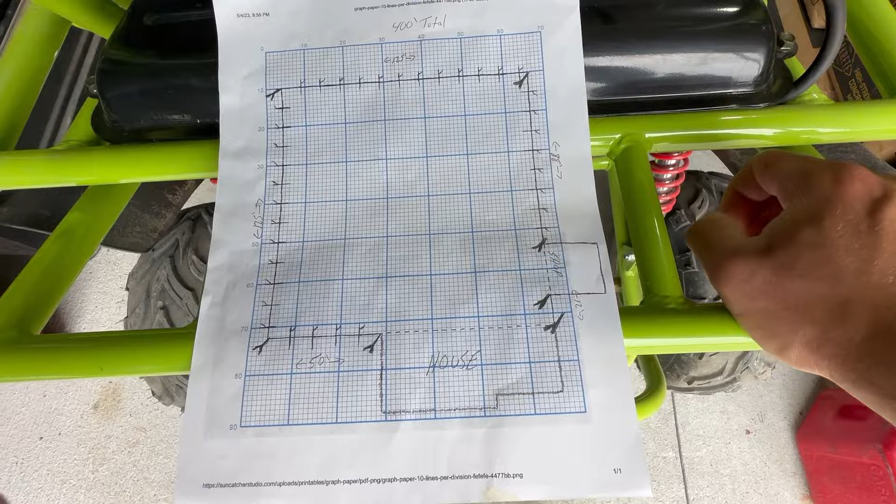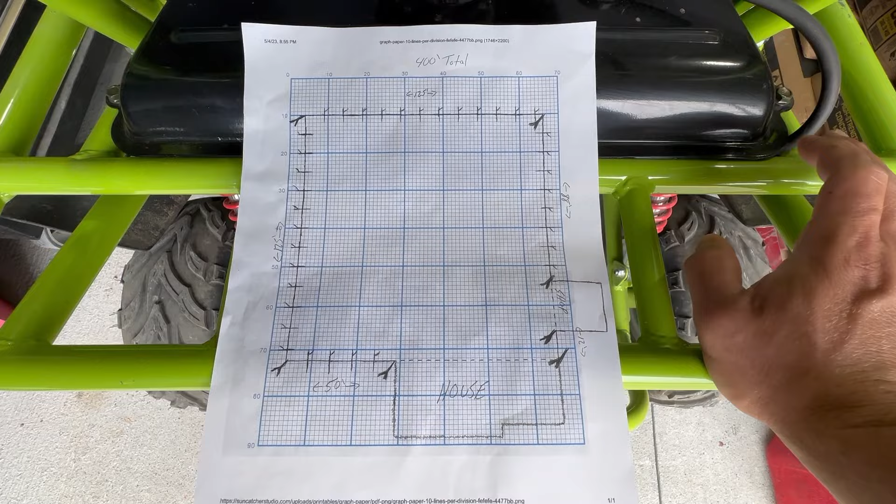First, what I did was I went on Google Maps, and if you type your address in, you can pull like an overhead view, like a satellite view of your house. And it's really nice, especially so you can get an idea, like if your neighbors have a fence that you like the size of. If you right click, you can go to measure, and then you can actually draw lines in the Google Maps, and it'll show you, well, not exactly, it's really close though. It'll show you about the size of their fence, or you can get an idea of what it'll look like on your property. But that's what I did first.

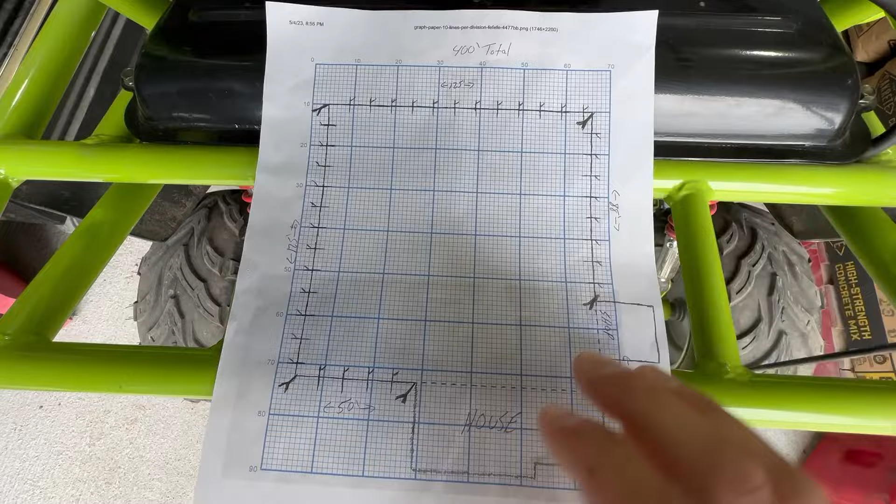And then I went outside and I kind of measured everything out and drew it on this grid paper. The reason it's really good to do that is so you can get an idea of where you want your terminal post and line post to be. And it's easier to say 1, 2, 3, 4 than to try to guess in your head about how many posts, especially when you got this much stuff going on. It's easier to just have something visual so you can keep looking at it, especially when you're ordering stuff.

I ordered all my stuff online, so it was easy to go back and say, hey, I need this many terminal posts. I needed this many tension bands, or this many tension bars, or the post on the top. I mean, it's just easier to draw it out and look at it. So I went on Google Maps, figured that out, and then I went and drew it.

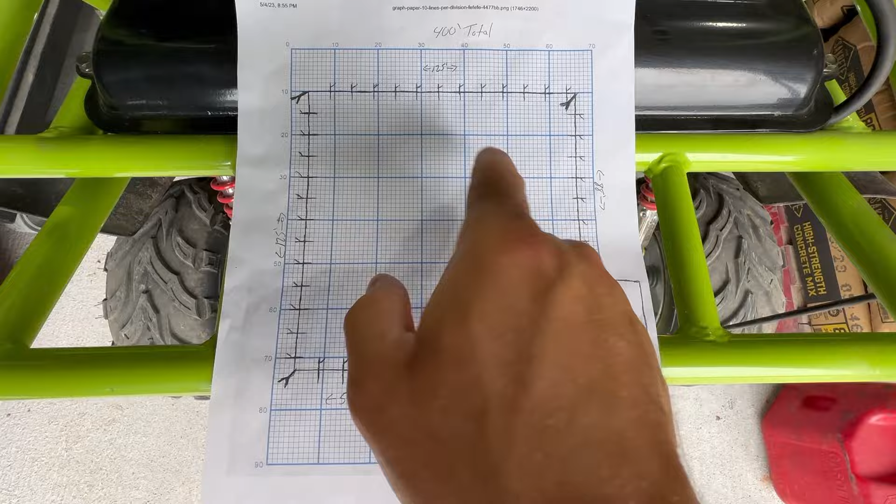And then I actually went out and walked it in my yard to make sure that that was going to be sufficient for me. And as you see, I kept it within like the 50-foot increment marks, so it'll be right at 400 feet.

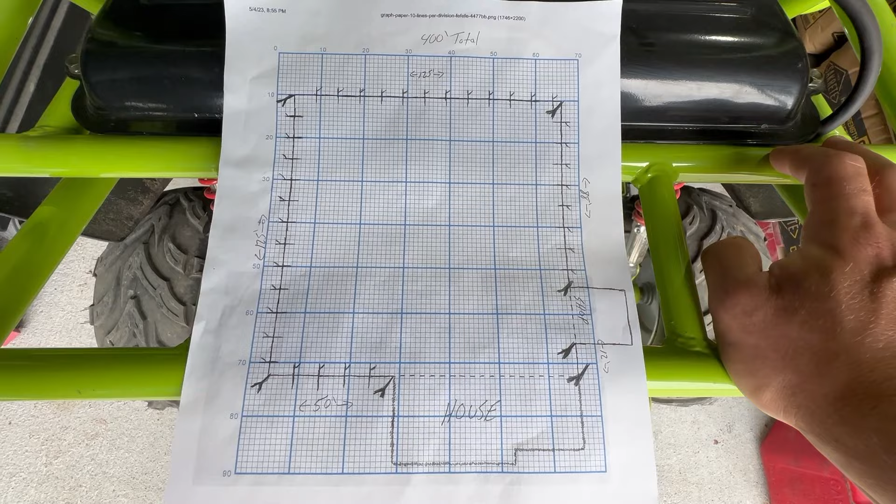Those rolls, I'm gonna give you some advice right here. I think you need to probably stick with those rolls. 9 of them come to a pallet. Okay, if you only need 6, still get 9 and just take the 3 back to the store if you can do that, because I have seen too many times where you get 6 and the people don't put them on a pallet right, and the fence gets all bent up and screwed up, and then you have to deal with trying to straighten it and everything.

It's easier to just get a pallet that's strapped together, never been tampered with from the factory. It's coming straight from the factory like that. Nobody's taken it off and screwed it up or nothing like that. So let's go on to the next step and making sure everything's square.

To make sure that your fence is square with your building or house or whatever, you're going to be using something called the 3-4-5 method. And what that is, it makes a triangle, and you'll know everything's square. So right here, for example, you can use 3 tape measures. You can cut a piece of stick, a piece of pipe, whatever you need to do to make sure you got 3 foot, 4 foot, and 5 foot. Does that make sense? Because that makes the triangle, right?

So you can get a piece that's 3 foot here, get a piece that's 4 foot here, and between those two, if it's square, it should be 5 feet. What I did to make sure I was definitely square, instead of 3, 4, 5, I did 6, 8, 10. You got 6 feet long, 8 feet long, and then between those two should be 10 feet if this is square.

And I obviously checked it here to make sure that this was square. And then I went on the other side of the house because I wanted it square with that as well. So that's how I got my square. After I figured out where everything would be square, I got a piece of rebar and I put it in the ground right there where that post is, as close to the building as I can, where I want my fence post to be.

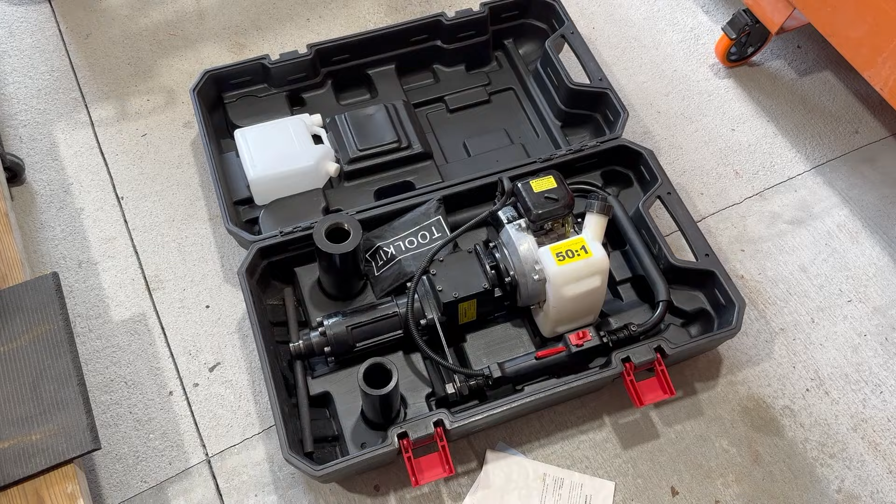Normally on these Chinese units, as long as you do your maintenance, keep everything clean, keep clean gas in it, make sure nothing's dry, make sure everything's greased and oiled like it should be, these things will last a long time. I've used this thing to drive in 10-foot sticks of rebar all day on retaining wall jobs and stuff. It will take a big piece of rebar and drive it all the way 10 feet down in the ground with no problem.

I drove all those fence posts with it a foot in the ground, no problem. Matter of fact, it was kind of too fast. I had to baby the throttle to make sure it didn't drive it in too fast. This thing works great. You can probably rent these if you don't want to buy it. I think I paid like $284. It was on sale at that price. I think regularly it was like $350 or something, but definitely worth it if you're going to be using a sledgehammer a lot, because this beats the heck out of using the sledgehammer.

And like I said, I've had this for about 5 years and never had an issue with it. I'm sure you can probably rent something like this if you don't want to spend that money. If you're only going to be using this one time, you might as well rent it. But that's the gas-powered hammer if you've never seen one.

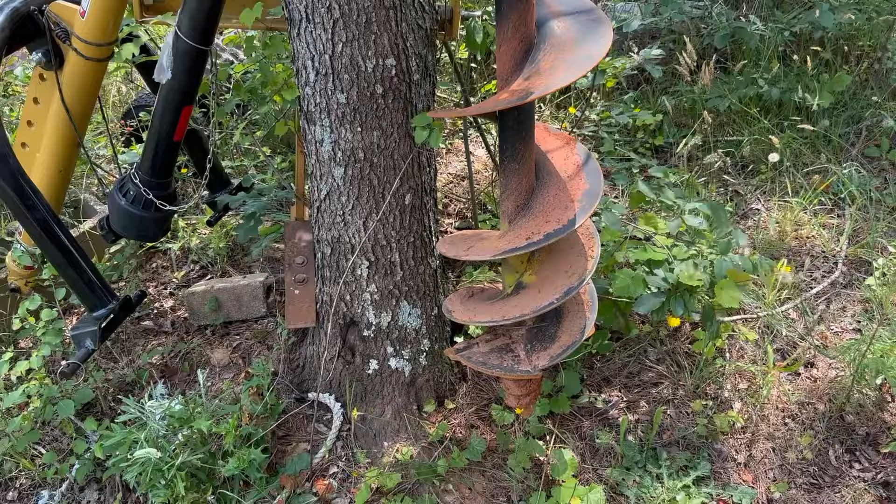Here's the auger I used. I used it on the back of my tractor. It's a 12-inch auger. It's pretty cool. You can still see the yellow paint that I marked right there. I put that as a 1 foot mark, from the bottom of that to there. So that way I knew where to stop to make sure my hole was 1 foot deep. You can rent these as well if you have a tractor. The local places I have, you can rent them. You can also get manual ones.

You can also have lots of fun and get a post hole digger. I did have to use a post hole digger on all those holes, because as you know, if you've ever used one of these, it does not clean the hole out perfectly. A lot falls back down in it. So I went around, drilled all my holes, and with post hole diggers I just cleaned the soft stuff out of the hole.

So let's pretend that my mason's line is still here. Remember in the beginning of the video, I talked about having a rebar there, mason's line, rebar here, mason's line, rebar there, and so on. So I went up through here. I have a really long tape measure. It's like 300 feet. I laid it out.

You can use a regular tape measure too. I actually did use that to double check everything, but what I did was measure my distance between there and there, use my calculator to see what my spacing needs to be, and then went up through here and made marks with my shovel where I needed to dig my hole. And then I came down through here.

I left my mason's line in place, and I had my dad come pull the line out of the way. I would dig the hole, then he would let go of it and it'd go back in place. And we'd walk down here, because I've already made my mark with my shovel, so I knew where to put my digger or my auger. Grab the line, he'd move it out of the way, I'd dig the hole.

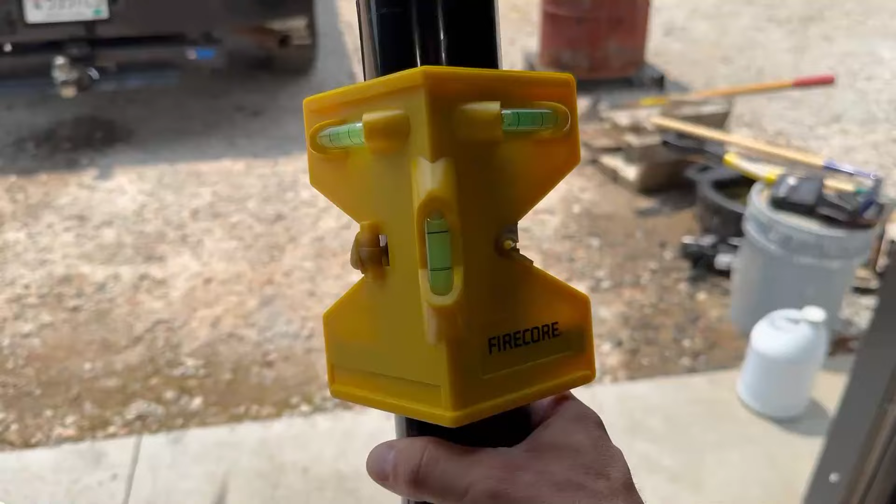But this is the piece of post that I cut off. Those 2 posts right there, I had to cut those off a bit because the foundation to my shop and the foundation to my house came out about 2 feet. So I had to cut them off about that much and use a little bit extra concrete. Anyways, that's where this piece of fence came from.

But this is a post level. This is a rubber band on it. It's got where you can just, let's see if I can, yeah, you get what I'm saying. It's hard to look at a camera and do this at the same time. But I have my dad hold this while I hammer the things in the ground.

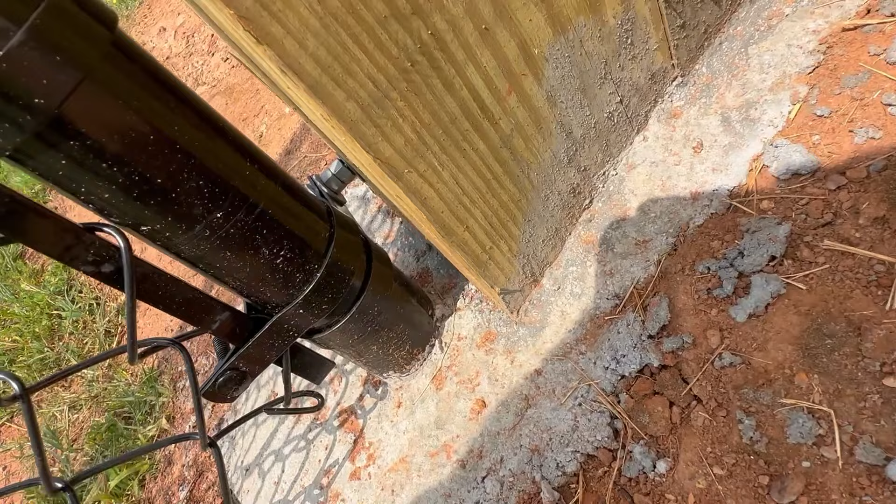So this post is in the ground good. I cut these off to match the top of it. Used these 2 screws to hold everything in place, and then I concreted around. And these 6x6s are bolted together. They're definitely not going to come apart. This is very sturdy. It's not going to be moving anytime soon.

But plan is, once this dries out, I'm going to paint it black, and you won't really be able to tell anything. I also, not sure if you can see the gap, but I don't have it touching the house. It's maybe 1/8 of an inch away for bugs and things like that. But that's what I did there. It doesn't look the best, but I didn't want to deal with drilling into my house foundation. I didn't think that was much of a good idea, so this is what I came up with.

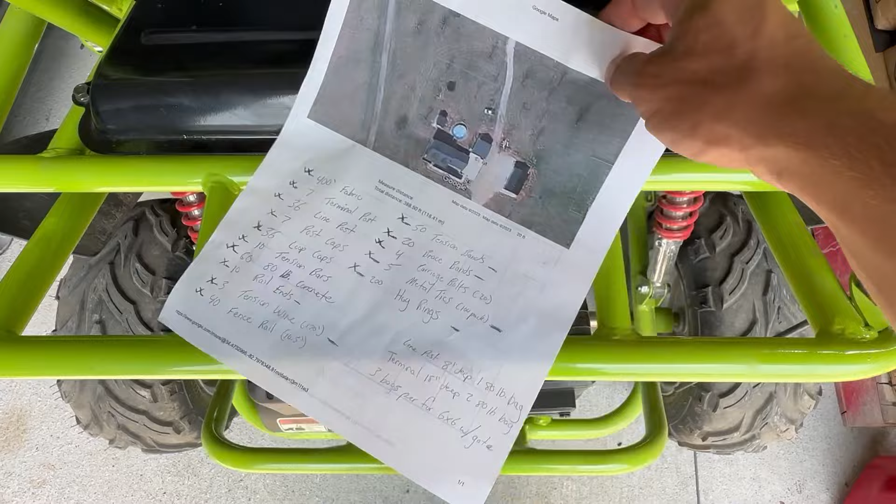When I was talking about this, I completely forgot that it was on the back of this. And this is the Google Map kind of view of my house. And that was where I drew out the fence. And that's about exactly where it was going to be. It's a very old picture, you can tell. But that's where the fence is going to be. And what was cool about this, I could write down everything that I needed.

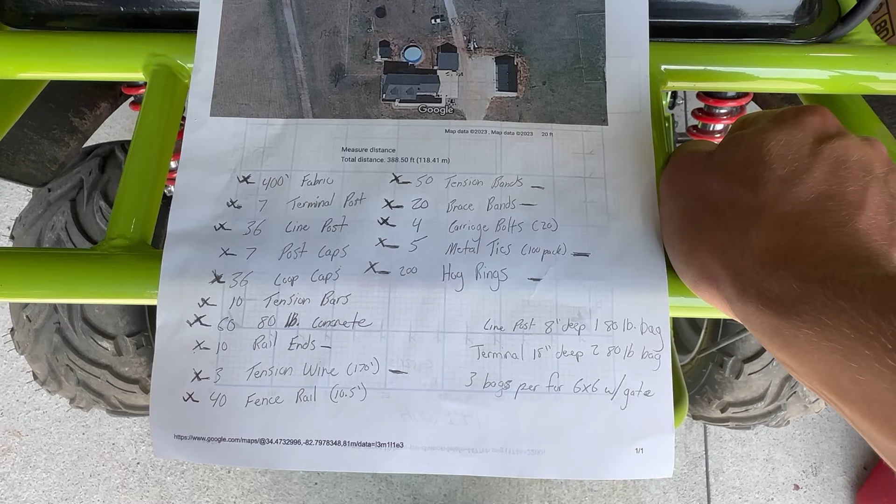400 feet of fabric, terminal posts, line post caps, and so on and so forth. And I could kind of figure out exactly what I needed. I ordered actually more than what I needed for most of this. This is just like the bare minimum, if that makes sense. But I ordered more than this just because on the Lowe's website you get bulk discounts.

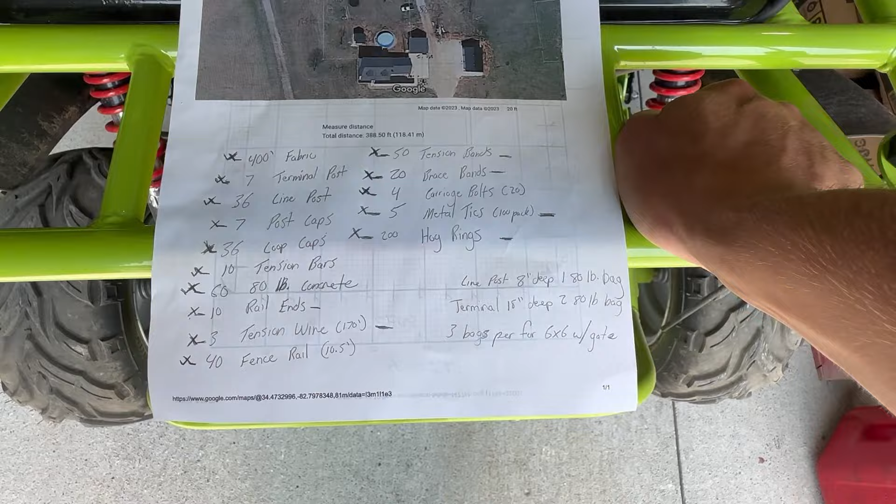And as I was explaining a while ago about the fabric, if you order 9, that comes to a pallet. So I got 450 feet of that instead of 400. And the concrete, I obviously got some left over, and that's for another project that I got going on. See, I only needed 60, but I ordered 84. But anyways, that's what the overhead view is going to look like. It just made it a lot easier to be able to look at this.

All right, guys. The reason I keep coming right here is because this building is blocking the wind. It's really windy today, and I want you to be able to understand what I'm saying. So now that all your posts are set in concrete and everything's ready to go, you're ready to put your fabric up. You're going to have somebody hold this roll of fabric. It's not heavy, but it's heavy enough to where you need 2 people, one to hold the fabric, and it's in a roll, obviously.

You get your end. It's probably a good idea to go ahead and get all your bands slid down to the bottom so you can just pick them up and slide them where they need to be, to hold the fabric in place. Then you get your tension bar, and you literally just drop it straight down through there like so. You fasten it in. I didn't fool with getting these tight yet. I just got it to where it kind of held everything in place. So I got these held in place, and then I stretched the fabric out.

Let's just walk over here. Instead of imagining, you can just see. So we've got somebody holding the fabric up, got the tension bar through it, got the tension bar through the bands, got the bands tightened down. Imagine you got a big roll of fabric here. Just roll that stuff out all the way down through there and lay it on the ground. Without any tools, just kind of pull it out and stretch as much of the tension out as you can, because this stuff stretches good. It'll surprise you. Just by shaking it and working the looseness out of it on the ground.

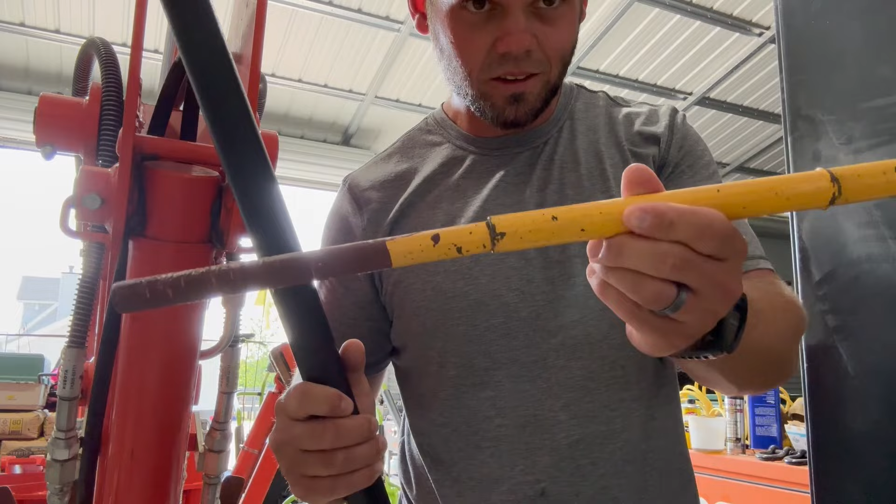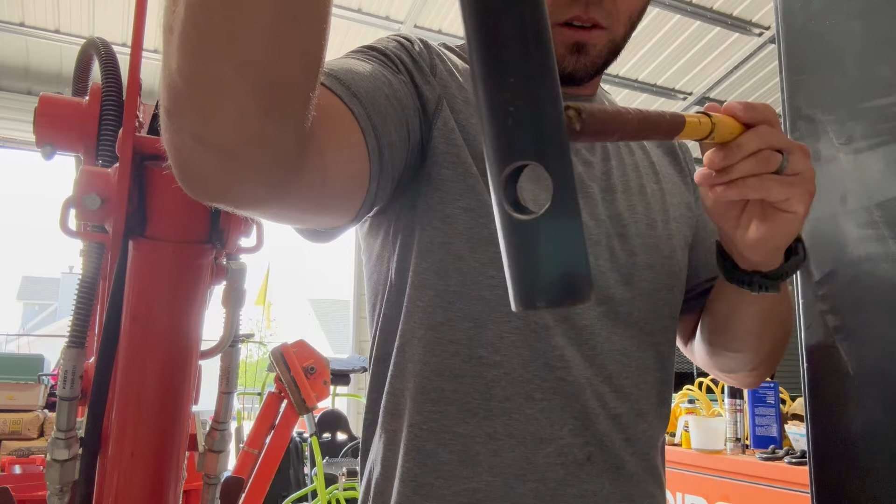And like I said, you can buy this tool, but I just use, this is an old jack handle. I always keep random stuff like this around. This is a piece of pipe. I drilled, see that hole right there? This is a small hole. You run your wire through this. So imagine your wire's running through this and it's against the fence pole, right? Well, I drilled a big hole right here that this can go through. So you got your wire in through and it's against the post.

You literally just turn it clockwise and that tensions the wire. And you just keep turning it until it's tensioned enough, and then you turn it back and it'll stay tensioned because that wire is so thick and stiff. It'll stay in place, and you can just get this out of the way, wrap it around with your needlenose pliers or lineman's pliers or fingers if you got that in you, and snip it off.

All right, so we went over getting everything square, getting the mason's line set up, getting our holes dug, getting our posts in the ground, the concrete in the ground, the wire set up, the top rails on. Obviously the caps just set on there. You can get a mallet and hammer them on, or you can just twist them on if you got enough grip strength. We've got the tension bands and bars and the end caps and everything set up. We've went over getting everything tensioned. You should be ready enough to at least get a section of fence put up.

And once you get that figured out or figured out how to do, you can do the rest of it. Now that we've covered all that, I'll go ahead and show you this gate. As you can tell, that is not a standard chain link gate. I called around, that's a 12-foot wide gate. And I called around, you have to get this custom made in black.

I couldn't find anything over a 4-foot gate in my area, and it was galvanized only. Come to find out, you have to get those custom made, like by a local welder. If you watched any of my other videos, you know I know how to weld and everything, but that takes some time. And then when you go to weld on this black vinyl, you're gonna end up melting some of it off. You're gonna deal with painting it and all this.

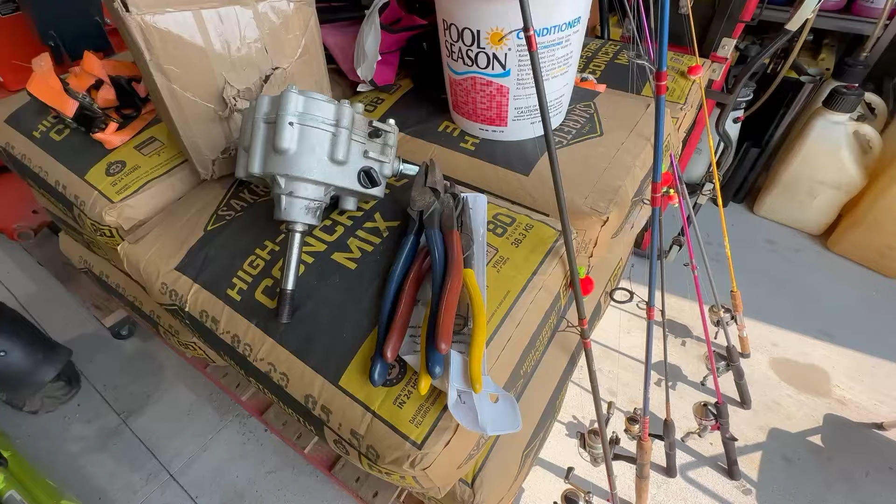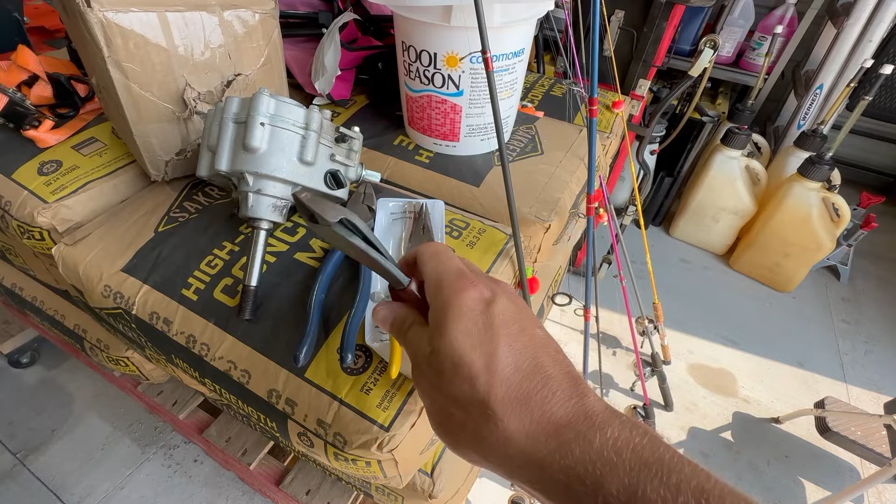As far as tools go, I used an impact driver with like a socket adapter, but you don't have to use that. You can use a ratchet. The impact was a heck of a lot faster, but I used a ratchet on everything to check the tension to make sure the tension was right, because I didn't want to over tighten anything and strip the bolts out. I used this set of Linemans Pliers for bending the wire that we were talking about earlier. I used this to cut the wire close if I couldn't cut it close enough. These are just side cutters, dikes, whatever you want to call them.

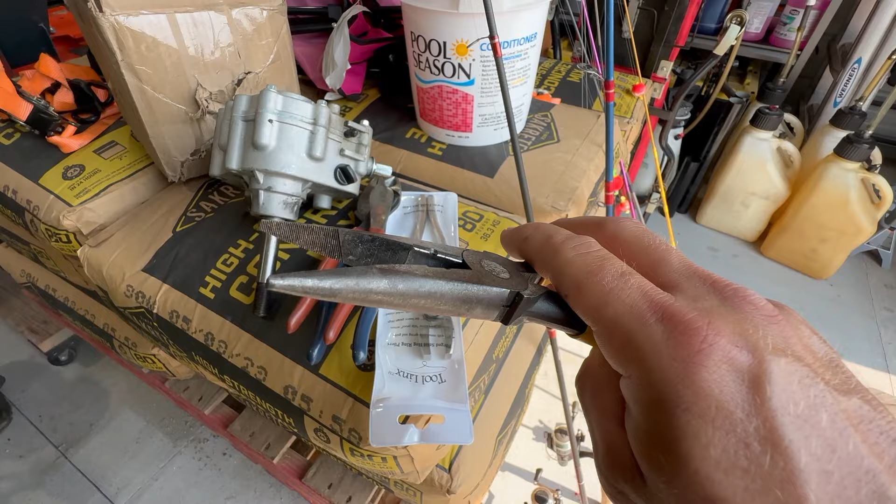And I used these Needlenose Pliers. You see how a lot of Needlenose Pliers are smooth, but you see how that's serrated? These grab really good if you're trying to pull something. These are mainly for electricians, but I use these. All of these are Klein. Klein's really good stuff.

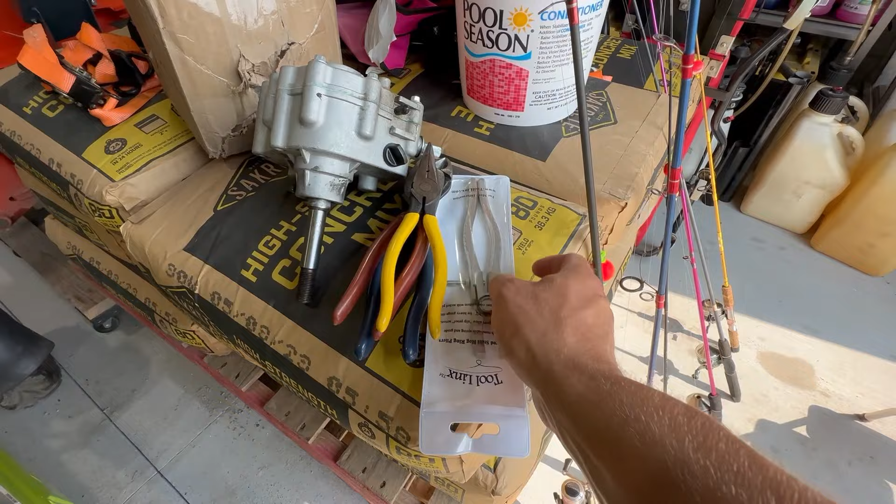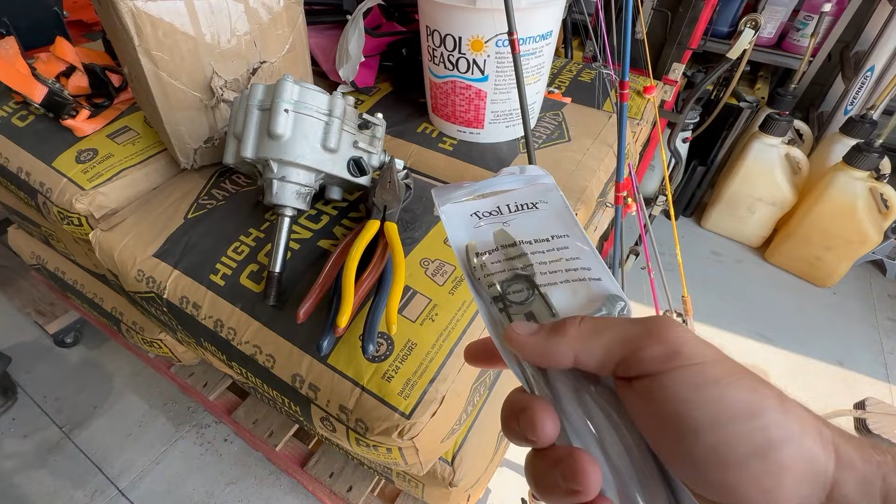And I also ordered this set. I didn't have these because I've never done this before, but these are Hog Ring Pliers. They have a groove. See that groove right there? The hog ring actually sets into it, and that spring holds it together. So all you got to do is go up to the tension wire and squeeze it, and it perfectly goes around. And the spring has tension, so you can just pop another hog ring in and then go down through your fence like that and just get everything.

Other than this, I used, like I said, the auger. I used the gas-powered hammer. I used a set of bolt cutters to cut the rebar when I was driving for the mason line. Used a knife. Bolt cutters to cut that, knife, ton of stuff. I used a pencil, used tape measures. I did use a porta band as well.

If you don't have a porta band or want to buy one, you can use a hacksaw for cutting really close to the house. Even if you use the little cap, if you're using a sledgehammer, when you're hammering the tops of those, they do get kind of screwed up. So you can use a hacksaw or a porta band to cut off the top just a little bit, just to make sure that it's not all warped up and dinged up. Because if not, your caps are not going to slot on right.

I set all my caps on, but I haven't gone through yet. I was going to go up through there with a rubber mallet, just tap them all on, and that'll probably be fine. If I can't, I'll just cut them level with the porta band. So pretty sure that's all I used. I'm really trying to think to make sure you have the tools you need and don't run into any surprises. An adjustable wrench for the gate if you decide to go that route. I also used the impact driver for the screws to hold the wood together. But if you're cutting with saws and all that, I'm assuming you got something to drive screws. I think that's everything.